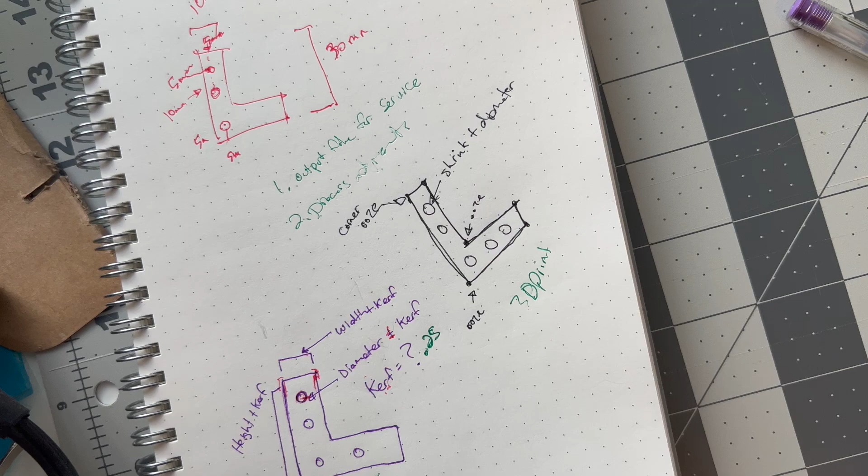Hello again, magical creatures. We are going to make changes to our file today, specifically for 3D printing.

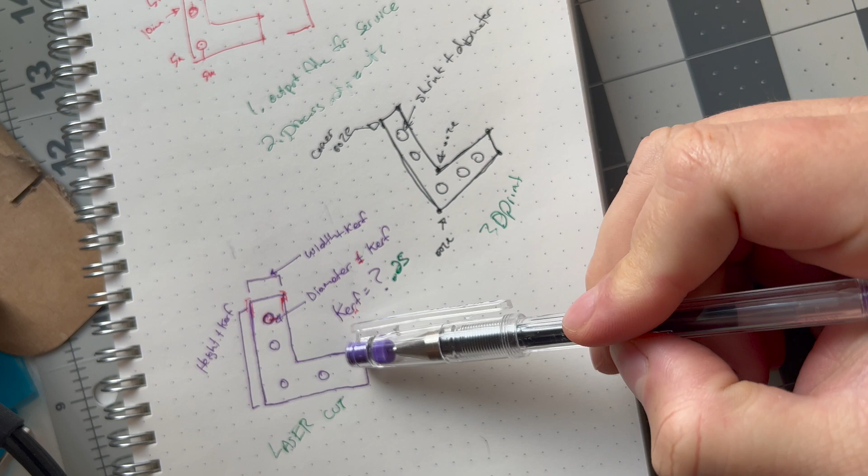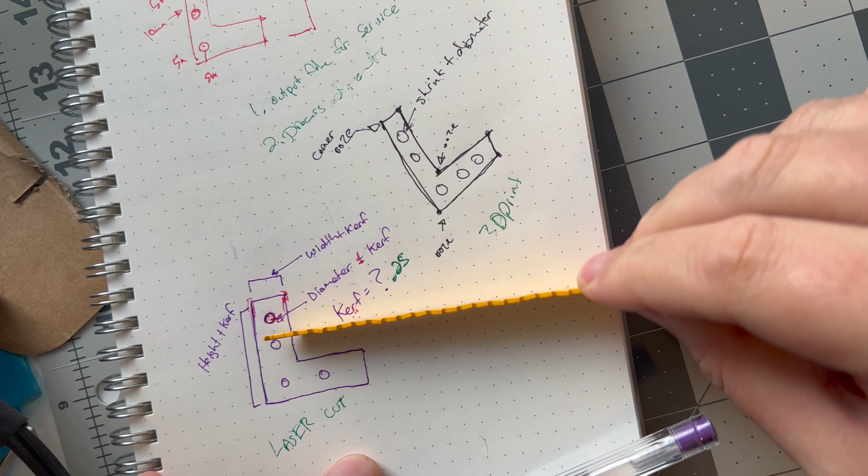So for laser cutting, which is subtractive, we have something that's cutting away at a solid piece of material. And as it does it, the width of the cutter cuts away a little bit too much, and there's some sort of compensation that we have to do. And we focused on the holes and the width and the height here. And on 3D printing, we have a different effect, and it's actually the opposite. I'm just gonna call it oozing or shrinking.

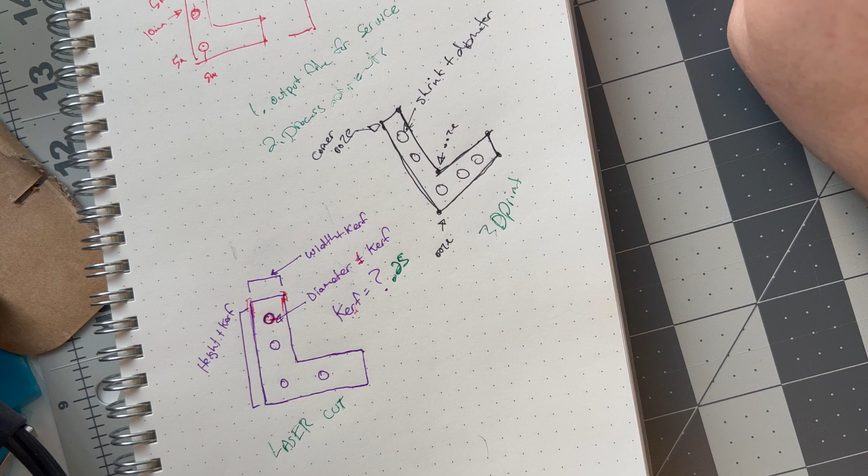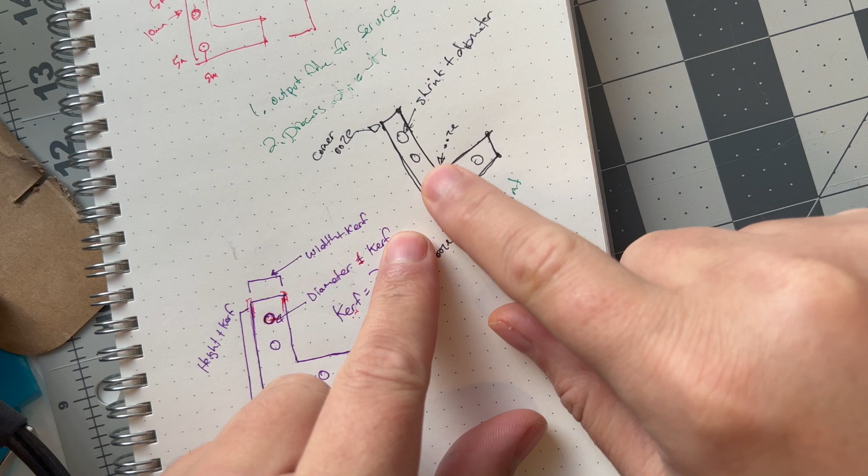So let us consider the same shape, and I've drawn these little spots here. Basically, all of the corners and the holes are subject to either shrinkage or oozing. And let me show you what I mean real quick. I have these 3D printed parts, which is our bracket. And you should notice that the holes on one are bigger than the holes on the other. And this one on the left here is the one that is true to form. It's 3 millimeters, it's 10 wide.

And you can tell, maybe a little bit more clearly by looking at the back, that on this corner here, there's a little pop-out part. And on this corner here, there's a little pop-out part. And then over here, there's one. Just a little bit. It's very subtle. And the question is, does that make enough of a difference to affect things?

For just a regular part like this, where there's no absolute fitting required on the outside dimensions, you're not trying to fit something in edge to edge where it snaps into place, it probably doesn't matter. But eventually, very quickly actually, we're going to get to things where pieces snap into place, and that little tiny bump will make a huge difference. And then of course, we've already talked about the holes.

This hole's supposed to be 3 millimeters, and it's not. It is 2.47. 2.47. It is too small. These shrink. So what you do is you find the shrinkage for the holes, and there's a rule of thumb that we can use for 3D printers. We got roughly 3 now. You see that? So the compensation that I've already made basically works.

Let's do it one more time. Let's do it here. I'm using a rule of thumb that we'll learn today. So let's talk a little bit about how it's happening. It's basically because 3D printers aren't all that magical. They are just glue guns.

So how does a glue gun work? A glue gun has this nozzle, makes the plastic inside the tube hot, and then some pressure. We'll use the handle; there's a motor that does this. It starts to squeeze out some material, and then that material gets laid in a bead across the surface. And humans sort of do things fluidly, right? But robots kind of don't. Robots kind of do this thing where they go,

notice that corner has a little bit of overgooping because there is oozing happening, right? This plastic is this fluid substance, and if you stop, it builds up. And so that little stopping the machine is doing causes the corners to overflow just a little bit. And the other thing that happens with plastic, which I don't think we'll be able to see today, is as it dries, it'll shrink.

It's hot and it's expanded, then it cools down and it contracts. And when you have it in a circle like this, it contracts more or less evenly around the diameter, and then the hole gets smaller as a result. So holes pretty much always wind up a little smaller, and corners almost always wind up having just a little bit of oozing, goopage over there. How do we account for this?

Well, if we look at the tip of this thing here, the nozzle, which it's not going to want to focus on, because why would it ever? We can measure this. This nozzle width is some diameter. We'll just give it a try. It's 1.5. And the question is, if we measure the shrinkage or the oozing, look at that. It's about 1.5.

And so the rule of thumb that I use, that works basically every time, is for diameters of circles to expand the diameter by the width of the nozzle. Different 3D printers have different nozzle widths. My friend who made this one for me, his 3D printer has a 0.6 millimeter nozzle. So I just went in and used our kerf measurement and said plus 0.6 millimeters.

Did it work though, right? It did. Oh, that's the wrong side. I forgot how to, oh. And it did. Right at 3, right? So 0.6 millimeters wider because of the nozzle width. And then I did the same thing for the corner.

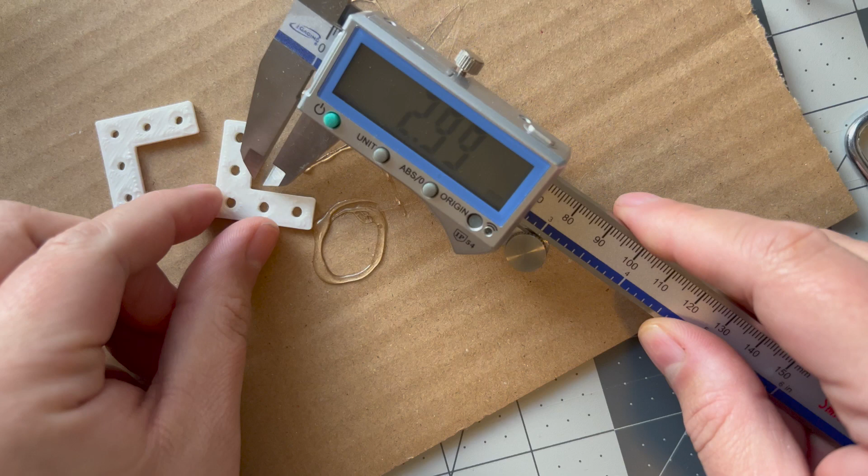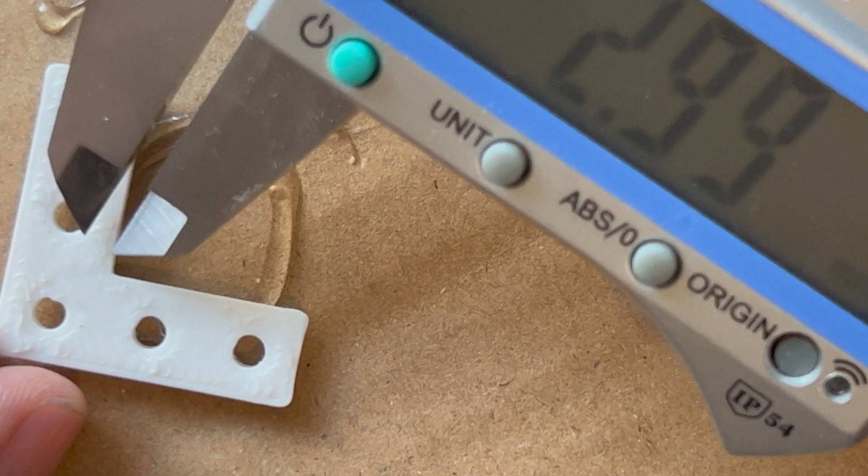There's a thing called a fillet, which we'll do today very quickly, which rounds corners, makes really nice inside edges. And then the inside corner is a little special. On the inside corner, a fillet wouldn't work because it goes in and it oozes towards the inside of the gap. So we actually have to cut away a little bit in order to account for the overflow so that the inside corner is a little sharper. So let's just go ahead, pop off to computer world and get that done, okay?

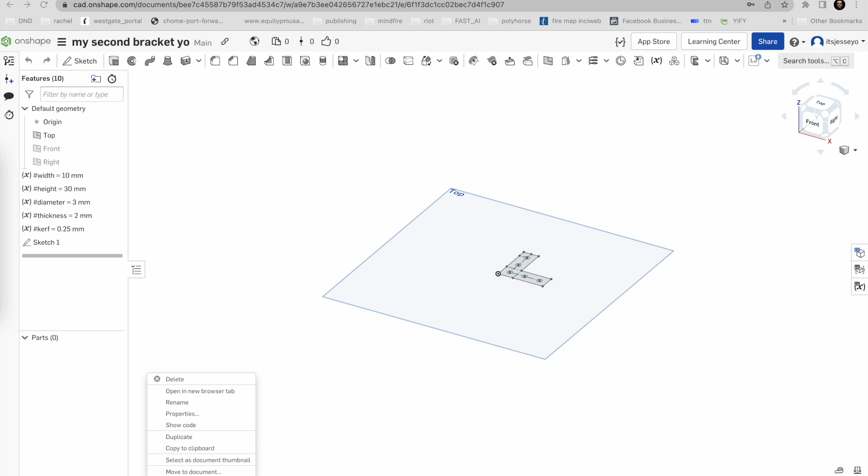We're back in computer world. And we are in our my second bracket, which we modified that part studio to create the laser output. And rather than editing this directly, we will right click on this tab at the bottom here and duplicate it. And we will rename it to be 3D printer. And we have already done all the setup that we need to, I believe. We have a width, a height, a diameter, thickness, and a kerf.

We'll go ahead and rename this to be clear. So I right click on it, go to edit. The name is here, and we'll call it nozzle because of the nozzle of the glue gun. The 3D printer has one of those. And we know that it is 0.6 because we talked to our friend and he told us. A lot of them are 0.4, but there's a shift in the 3D printing world to go to 0.6 for a lot of good reasons. So we're sort of on the bleeding edge.

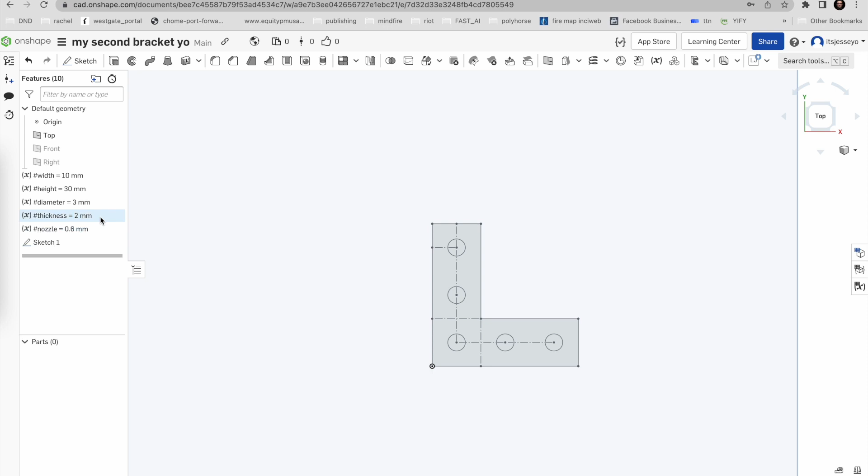We have a whole 0.2 millimeters, and all we have to do is look at this little guy here. We'll go double check the sketch and see what we have applied. So these holes are going to be the diameter plus the nozzle, which is what we want. Those holes are going to be bigger. We want to take care of these corners, and we want to do that special thing on the inside corner here that I talked about. So the drawing here is just fine.

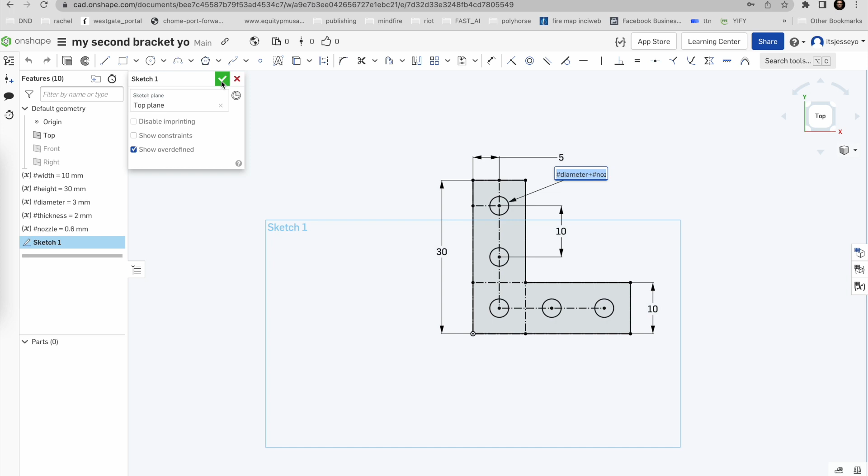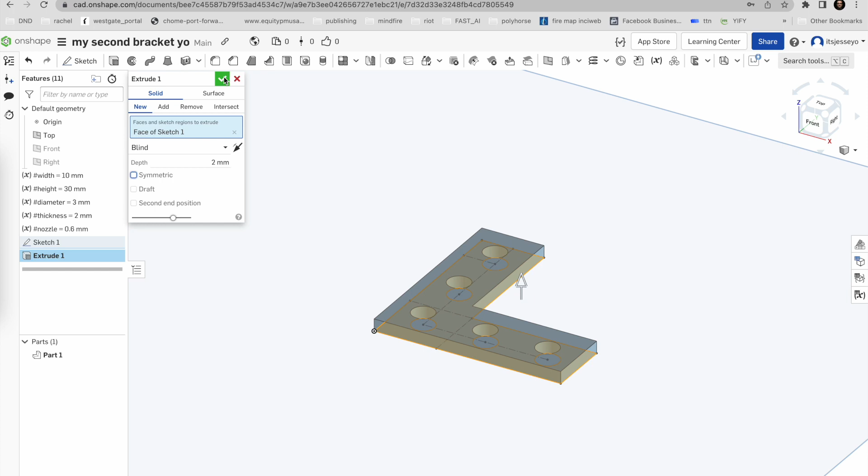And for 3D printed files, we actually use the extrude. So we just sort of roll over that spot and hit boop. But not the circles, right? We don't want the circles. We want the shape itself. We'll go up to here at the top, boop. And we want a 2 millimeter part. And then we want to make sure it's solid. And we hit OK. So the only thing left now to do is to learn to use fillets.

And there's a lot of, quote, operations that you can do. So this extrude was an operation to the drawing. And these other surfaces and edges you can do more operations to. And what we're going to do is do an operation to this edge here and see what happens. So going up to the top, most of the common ones are listed here, and fillet is one of my favorites. And maybe it's fillet, I don't know, but it just sounds too much like a fish. So I say fillet. And I hit that.

Notice that corner has changed. Let's look at it from this other angle here. See how it's moved inward and the arrow tells you which way it's going? And the radius there is 1 for some reason. But you can go all these different distances. You get these rounded corners. So if you want that nice Apple corner, I want to say it's roughly somewhere between 4 millimeters and 6 millimeters. And you can create these nice soft edges where the corners aren't pokey.

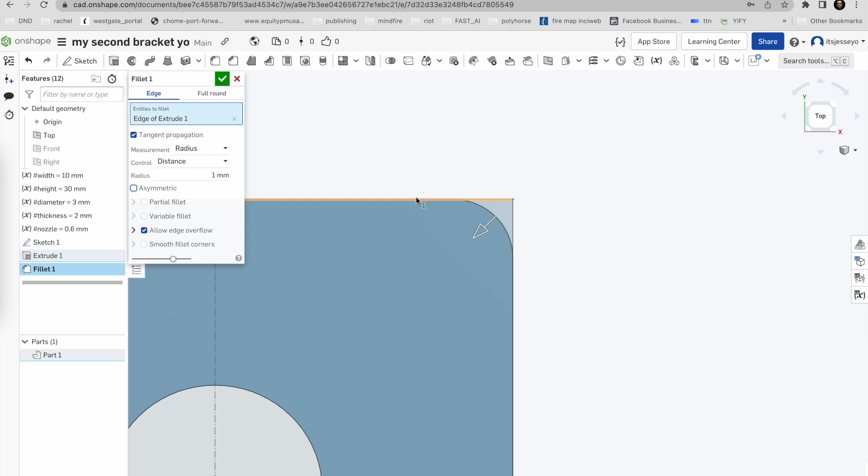But in this case, we just want to use it to get rid of some of that oozing that happens when the robot stops right there for just a second and starts its path again. So all we have to do is just click on that value, type in nozzle. And that should compensate for all of it. Now there's all these other corners. So we just go and select them all.

Boop, boop, boop. And get this guy here. Boop. Hit the fillet. We'll do it again. Now, I haven't really told you how to edit things, and I'm going to now. So all of them are done, but now we have 2 fillets, and we could have done this in one. So let's undo that. We made the 1 fillet, but it only affected the 1 corner.

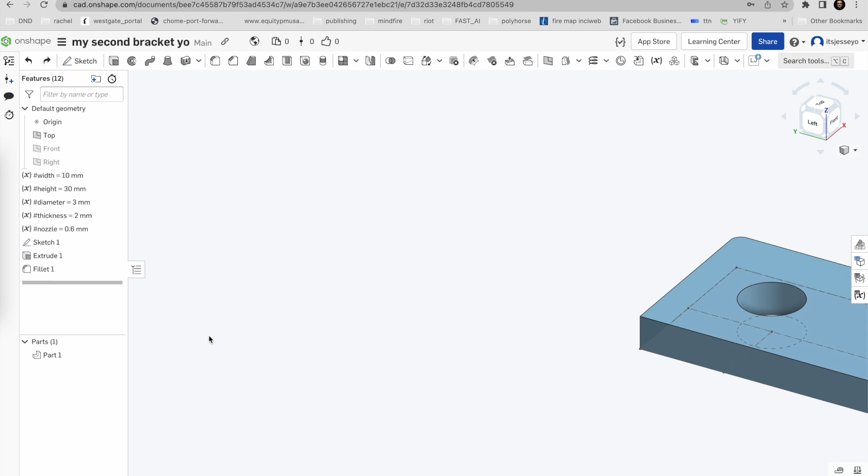Wouldn't it be nice if we could go back and change that? And you can. You go back to this layer, and you can do this for all the layers. If you want to edit a sketch, you can just double-click the sketch and edit it. We're going to double-click this fillet. And over here where it says entities to fillet, see how when I roll over it, that blue spot up in that dialog on the right, the little line that we had selected highlights?

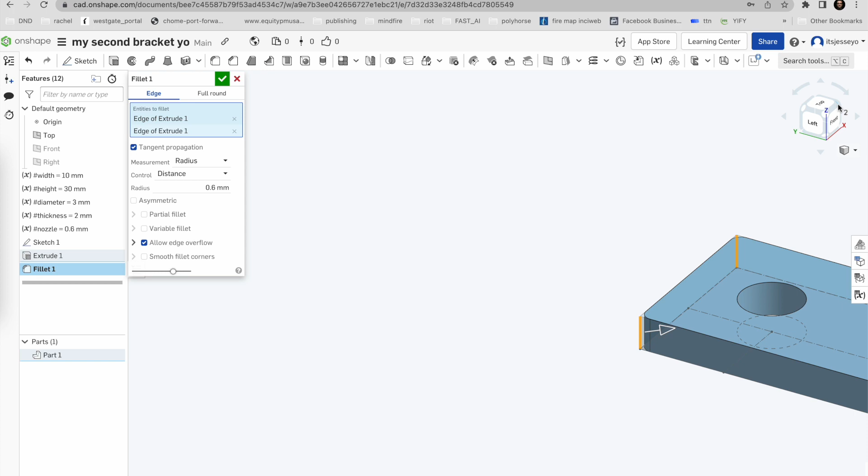All we got to do is, as long as that's highlighted blue, we can go and do it again. And again. And again. So now all of those corners, the outside corners, are adjusted for the nozzle diameter, and the ooze should be compensated for.

What do we do about this inside one though? Well, a real common technique is called a dog bone fillet, and I don't know that Onshape has one, but it's pretty easy to mimic. All we have to do is create a hole right at this point right here. So we select a point, so our sketch is visible. If it wasn't visible, we wouldn't have that point. Oh, we'd have the point of the surface, I guess we could use.

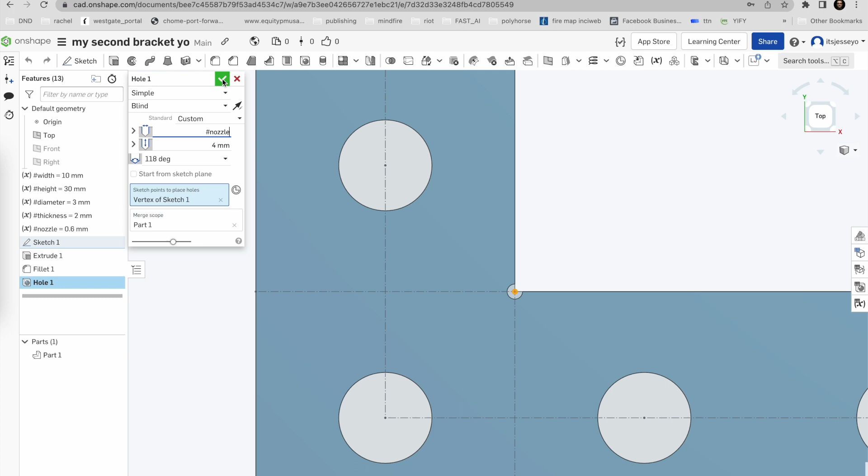Select that point right in the inside corner, and then we go up to the hole tool. Remember the old hole tool that we sort of used and then abandoned? Well, it's back, and it's going to be handy for us. So we make a hole. We just make that hole the nozzle diameter. We make it all the way through. And that is the first part of our dog bone fillet.

The other thing we want to do is get rid of these corner edges, because we don't want any oozing to come back. Right here are those sharp edges. It's kind of hard to see because of the angle, but we don't want any oozing to happen there, so we want to get rid of those. And we could go ahead and add another fillet, another operation, or what we could do is reorder this.

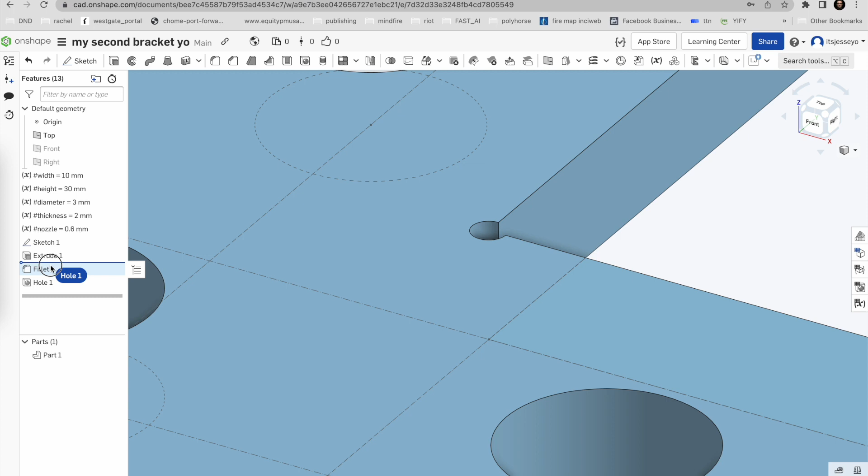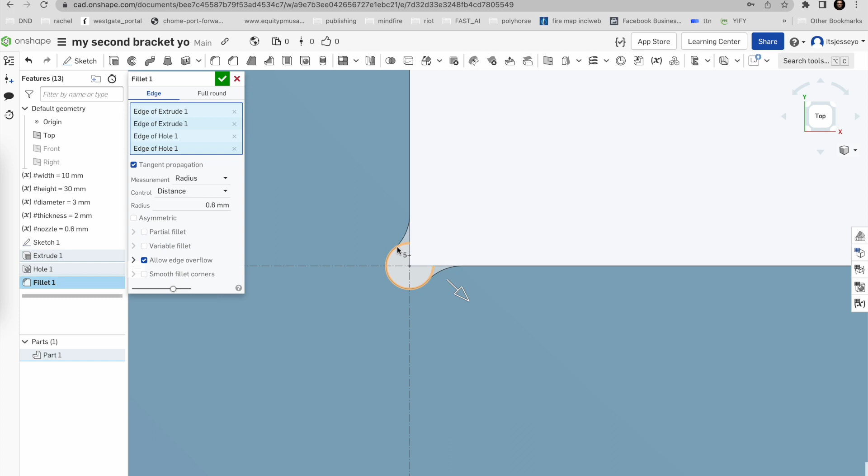So this hole, we could do the hole before the fillet, just clicking and dragging. Now the hole exists before the fillet happens, and now I can go open this fillet, and this is highlighted blue, and I can just select these edges. So we're doing a little revisionist history. So now, if you look really closely, let's get a good angle on this for you. Now, that's a nice, smooth, fluid thing with no sharp angles.

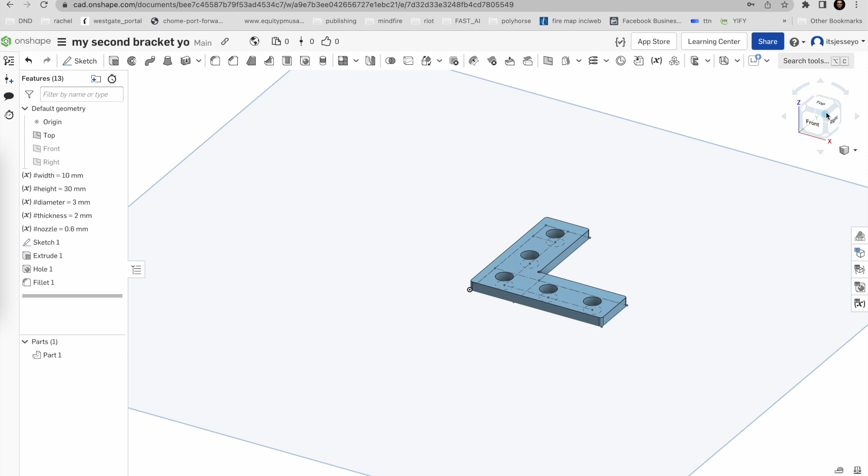And that's it. That is the exact part that I created. And as you saw before, the measurements are more accurate. The outside edge corners don't have that bump out. They're right exactly at 10 millimeters, and the inside is almost exactly at 3 millimeters, which is what we want, because the screws we have fit exactly 3 millimeter holes. And that is how you do it, folks.

At this point, you would go to the bottom tab here. You would say export. You would say the format is STL. That's pretty much the standard format for a 3D printer and whatever software they're using. And then you want binary. We made ours in millimeters, and I pretty much just leave it defaulted at fine, because it is so fine when you do that.

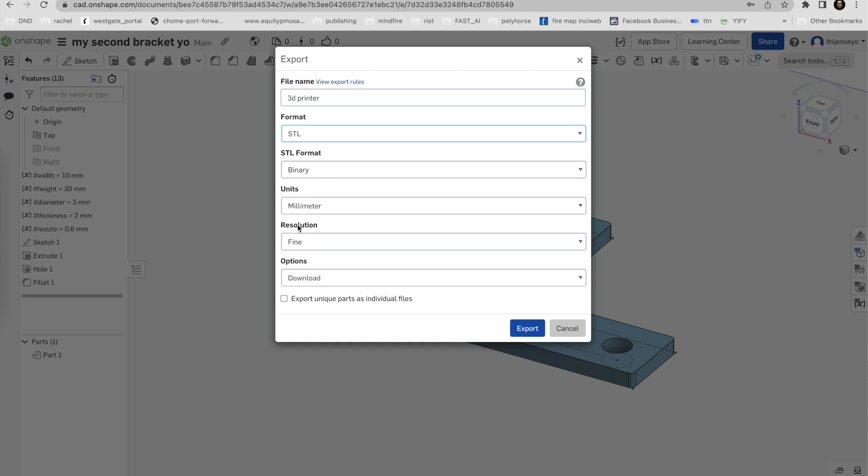And then we just hit export, and then it saves that STL file, and you could take it to a library to get printed. You could take it to a friend. You could buy a 3D printer, and you're all set to go.